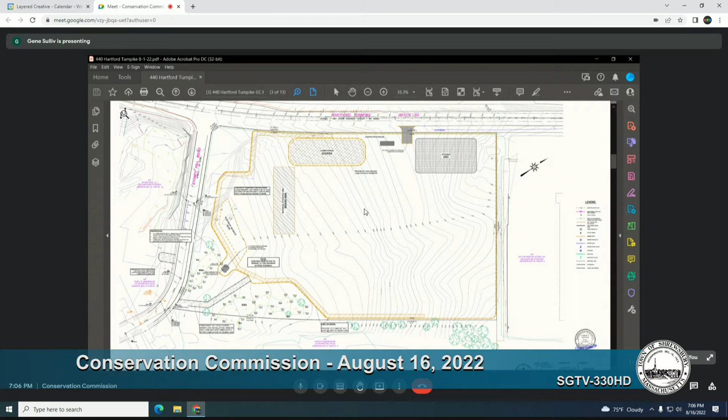I know over the years there have been concerns about water seeping onto Stony Hill Road while the site was previously disturbed. So we think we've addressed that pretty well, or very well, excuse me.

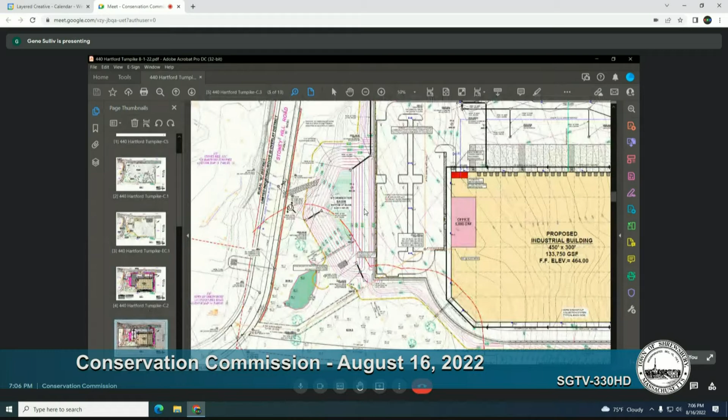Additionally, one of the other large concerns that came up both here and at planning was how to handle Stony Hill Road. I guess, again, because of the slope over there, they've had a lot of washout coming off this property over the sidewalk and even out into the street, from what I understand.

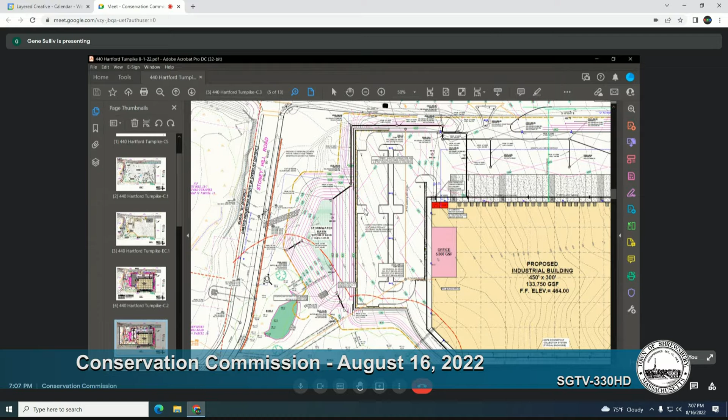What we've proposed, basically from the intersection all along our property line on the low side of Stony Hill, is a stone trench with a perforated pipe in it, upgrading of the sidewalk, but at the bottom of our slope, that'll collect any runoff that comes over from the small area. Remember, we had a huge site draining over here with a lot of slope that wasn't being slowed down or handled at all historically, and now we're going to develop it all, put ponds in and drainage and all of that. So the actual water even heading that way is going to be negligible compared to today's condition. But we did put a stone trench all along here with a perforated pipe that would hit a drain manhole on our property and pipe under Stony Hill to the wetland across the street, as was previously proposed.

What sheet does that show on, that stone? The best stone trench sheet is on C.3, which is a drainage and utilities page. We got like C2, C3, drainage and utilities plan. Yeah, if you look along Stony Hill, you'll see a red area with a stone trench called out. I see a red area. Yep, going all, manhole too, and there's a manhole at, kind of at the, right above the curve there. So basically it's just 2 perforated pipes, going to dump into that manhole. When it fills up, it'll go under the road and go across the street into the wetlands. So that should capture any concerns that we're having previously.

And I'd like to just reinforce again that the water that would get there after our development is completed is... And that stone is brought right up to grade? It's right up to grade, yeah. So you're going to see a 2-foot wide riprap area that'll have geotextile fabric on 3 sides, so that fines and so forth don't get in there and clog it up over time, with a 12-inch perforated pipe, which will get the water down to the manhole and across the street.

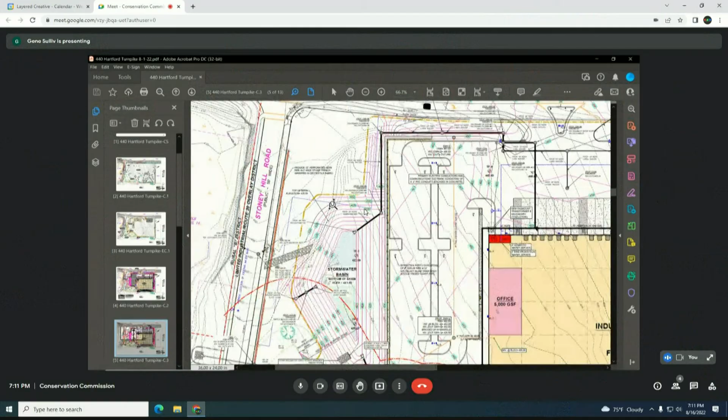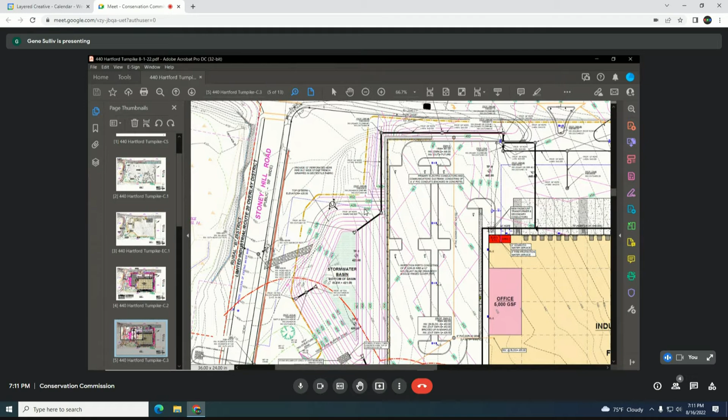The second question was regarding some of the wetland features and wetland plants that Art observed within the previously cleared and partially developed and graded site. He observed there were some cattails, sedges, woolgrass, and the like. That area that he observed is confined by erosion controls. It's part of an existing NPDES permit, stormwater, and SWPPP. So my opinion is that it's technically, while it's associated with sedimentation basins, it's really opportunistic plants that, with seed mix, part of the soil, birds come and deposit their waste, and so it's just plants that have evolved. I don't think it would be considered a wetland, given that even though it's a construction site that's paused, it's part of an approved NPDES permit, so technically it's still considered an active site.

So there was, at the outfall just immediately down gradient of the erosion control barrier, where kind of the whole site drains, a small pocket of wetland, herbaceous wetland vegetation, less than 400 or 500 square feet. I forget the exact number. I think I conveyed that in the memo.

That could be jurisdictional as a federal wetland. It's not jurisdictional as a state wetland, it's not considered a BVW, so I didn't delineate it. We're acknowledging it and providing slightly more wetland replication for the other isolated wetlands we're impacting on site, so it's not exactly one for one. We're not obligated under the Clean Water Act to replicate impacts less than 5,000 square feet, so we're doing this more as proactive mitigation to enhance the project. We think that's adequate mitigation overall.

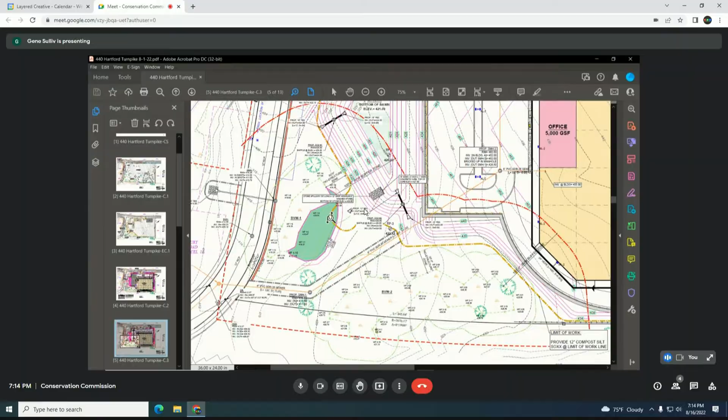Ready for questions? I think that's all we had. There weren't a lot of open issues as of our last meeting.

The other thing, we did update the wetland replication area planting plan. We removed the green ash and replaced it with elm, I think it was American elm. That was a comment made previously.

Martha? You replaced it with elm? Yes. Look at that, yes you did.

Is that elm a variety resistant to Dutch elm disease? I see it in the forested setting. I don't think that's part of the Dutch elm issue. The experience I have with elm in the forested setting is they might get to be about this big, get hit one summer with the disease, and then they're gone. I haven't necessarily seen that; I've seen mature American elms in the forest, mature trees, so that's not my understanding.

I'd make a request that you just look into it, and if it's, I don't know, maybe look into the background of that particular variety and see if it carries some resistance, or if it's even an issue.

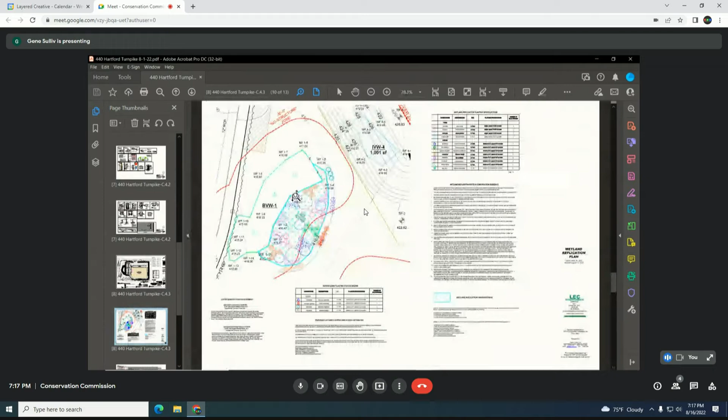You're looking to substitute the elm. That's it. Sure, we can do that. So it's yellow birch to be substituted? Yellow birch. Thank you, I will look that up because I'm intrigued.

I just have one question on the sewer service. You have the sewer service extending about 300 feet beyond where the connection is to the building itself. It's a 6-inch line going out to a manhole towards Route 20. Is that for future use? That's for a future connection, yes.

Today, our sewer service is designed to go down in the bottom left-hand corner, because that's what's available to us. If things change during construction, we'd be happy to bring it out front, but that's the intent of that line. Yeah, Mr. Chairman, I can update that. So that's part of the Phase 2 sewer improvements we're doing, actually part of the other parcel that Fran was developing.

Set. Chris? No questions. Andy? No, I think I'm all set. I sent the response comments to Art. I didn't hear anything back, but we only got them yesterday. I think we've addressed everything, so.

Does anyone in the public have any questions or comments on this hearing? I don't see any. We'll close it. Okay, terrific, thank you very much. Thank you. Thank you.

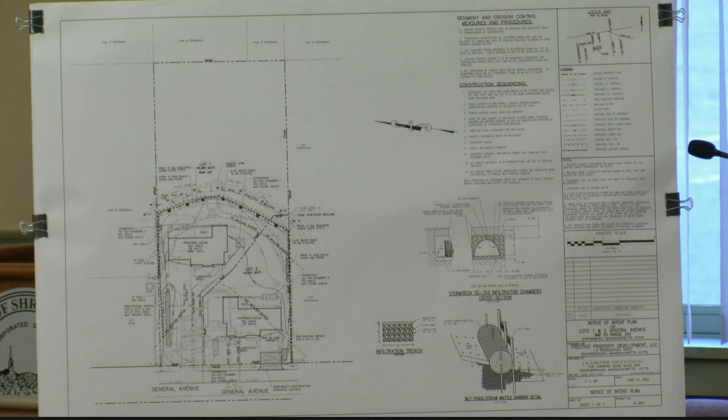The white pines were to address the owl issue, where the owls were, remember that? Well, wasn't that a concern? Because of the proximity to the house and the driveway, they weren't going to be able to save the pine tree. But Eamon did a little research on owls, and the only time owls nest is when they lay their eggs. Beyond that, they're often off in the woods; they don't have permanent nesting grounds, it's only when they hatch their eggs. So we don't think the owl's going to be a permanent resident, with or without the tree that's going to get taken down.

Martha, is there an existing tree you could put an owl box up on? There is a fairly large pine in the back that's staying, so we could do an owl box there. That might make the neighbors happier. Sure, consider it done.

That's on lot 1, right? Was that lot 1? I don't remember. Yep, lot 1 is correct. It'll be closest to where we're removing the existing tree. Hopefully they don't have any small dogs.

What else, Martha? That's all I have. Okay, Ken? All set. Chris? I've researched all boxes this weekend, so that's it. Okay, Andy? No, I'm just checking my notes.

Is there a note on that, because I didn't get a chance to look at the plan, about removing that debris by the shed? Yes, we do have a note on there saying that's to be removed, and we outlined the area. It wasn't a lot though.

Just checking my notes from last meeting. It was kind of fluffy too, not packed in there. It was more some small branches and grass clippings. Yep, no, I think that's all I had.

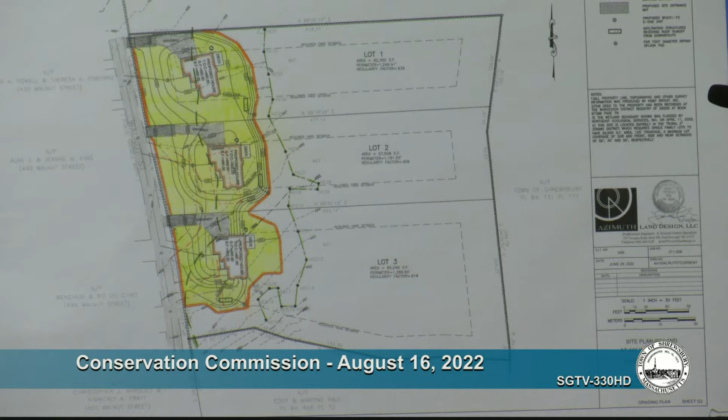James, for that boulder line, can you come up here quickly and point it out so we can agree? We have a wetland flag line, and then the erosion control line - where are you proposing? From here, all the way to maybe there. So you want it on the barrier. Yeah. And you'll give up this little area in here. Yep, that's the plan. Okay, that sounds fine. So it's going to zig and zag. Yeah, and they can landscape around it as they wish. And they'll still have - as you're out there - they'll be able to walk through, and there's still field here.

Mr. Chairman, we should also codify what was discussed at the last meeting - Martha was on point about how often and what time the cutting of the meadow grass could be prescribed. One fall mowing annually, I think we agreed - that's in the notes from last month. We said fall because the birds tend to nest earlier, and butterflies need nectar earlier too. Some individual homeowner at one of the lots might not do it, but if one of them does mow the area behind his extended backyard, that would be the limitation - since it actually has habitat value if cut once a year.

Yeah, I think no more than 6 inches was the other note. If you want to put a month, say October or September? Is September okay? Not good? I would say late October.

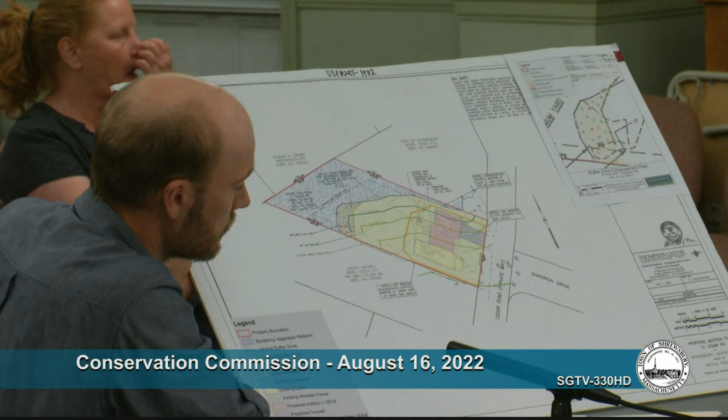What's your offset now to the side, to the wetland line from the addition? Did it change any since our last hearing? I don't believe it changed, let me just double check. So we're probably still 10 feet, was that right? 10 feet, yeah, I think it looks like it's about 10 feet. I don't believe it changed from the last plan set, looking at the original plan set submitted. Yeah, it looks like 10, even maybe a little less in places. 9, 10.

So that was one of the concerns we had last meeting. So what really changed now from our last hearing? The commission did ask that the buffer zones be put on, so the 50 and the 100 foot was added.

Just to clarify where those buffer zones were with regards to the construction, the buildings itself didn't get any smaller, or they didn't shift? No, it's a rather small single-family house on the property right now.

For Martha, do you want to make any comments? I'm just still not really comfortable with how close it is to the wetland line. I think we brought it up last time. What was preventing this addition from being reoriented so it's growing out toward the backyard? It seems you'd have more opportunities that way to keep your offsets closer to the commission's requirement versus this 9 feet on the side right now.

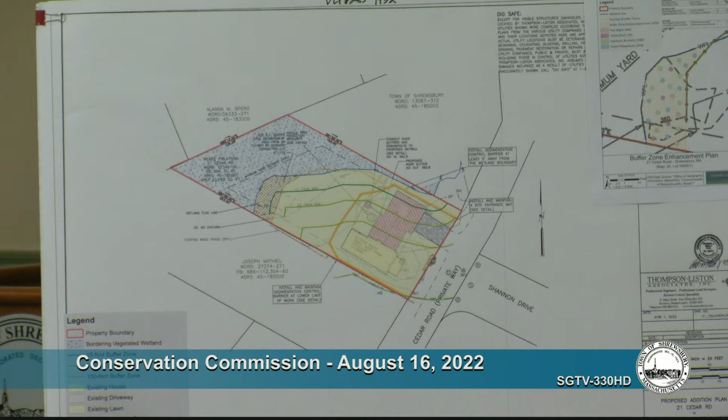But when you're saying curb cut, this is a private way. Is there a curb or is this just a street? I'm trying to remember exactly how that looked on site, but there's an existing driveway that comes in right in that area, you can see that on sheet 1. Right, but that's different than saying there's a curb cut you can't move. It's mainly just not altering the existing driveway location, not moving the driveway, is basically what you're saying. Yep.

I'm sorry Martha, you got anything else? Nope. Ken? No, I'm all set for now. Chris? No. Andy? No, those are the two things really, was the updating the buffers.

Does anyone in the public have any questions or comments on this hearing?

Is everybody amenable to going with the offset on the sideline? It's okay with you? I mean, I'm not happy about it, but this really doesn't seem like there's much of a choice, unless you have them reconfigure the home. That's what I thought was gonna happen from the last hearing, that they would gain another 10 feet at least, and then bump it out a little bit more that way.

You're taking away driveway, correct? Correct, so there's a section of the driveway that's at the end. The driveway extends further into the property than it will after, so in the sense you will have less paved area. Right, that's what I was thinking. You'll have less paved area, but you're putting a roof over it. Correct, but I guess it depends on how you catch the runoff - runoff off a roof is usually cleaner than pavement.

Okay, so it sounds like the commission's pretty much going along with the 9-foot, 10-foot offset to the wetland. I'm going to ask about a barrier on that side to prevent any encroachment into the wetland. Did you call any out on your plan? I don't believe we put any on the plan. There is, the backyard is already fenced in. Well, I'm not worried about the fencing, I'm worried about people just starting to encroach into the wetland on the side of the garage there, the addition.